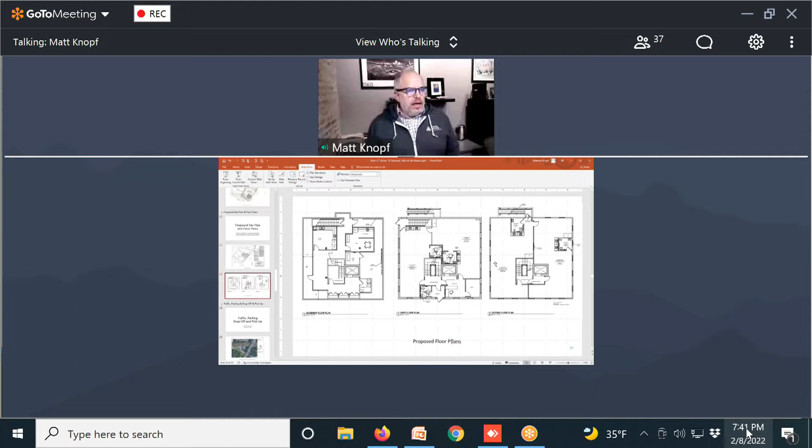So the first slide is in regards to classrooms, age range, and student count. There was some question on how the makeup of the school would be, so I wanted to clarify that, as we said and showed in the floor plan, we have 4 classrooms on site. First floor, we have a Nido classroom and a toddler classroom. On the second floor, we have 2 children's house classrooms.

On the Nido, this is actually incorrect, there should be 3. The age range for Nido is 3 to 18 months. Toddler classrooms is 18 to 36 months. Both children's house classrooms are 36 months up to 6 years old. You can see this is how the student count would break down in those classrooms. The opening is what we're anticipating as max enrollment once we ramp up, and then once we get accredited, our steady state enrollment is projected to be 78. That's what we're basing all of our calculations on regarding parking, trip generation, and everything, on the larger maximum number. I'll pause there if there's any questions on the classroom makeup, and then we can move on to the site plan and other information.

The time period between student opening and steady state is what? And that's dependent on state certification?

Yeah, it usually takes, my understanding, and Sarah maybe you could speak to this, but it usually takes like 1 to 2 years for us to get an accreditation in place. Similarly, it takes about the same time, we say 2 years, maybe a little longer, maybe a little bit shorter, to ramp up to a steady state. So we would anticipate in a year or 2 we'd hopefully be hitting this 56 mark. And if we're also simultaneously accredited by that point, and the need arises in the community, we would continue to ramp up to the 78.

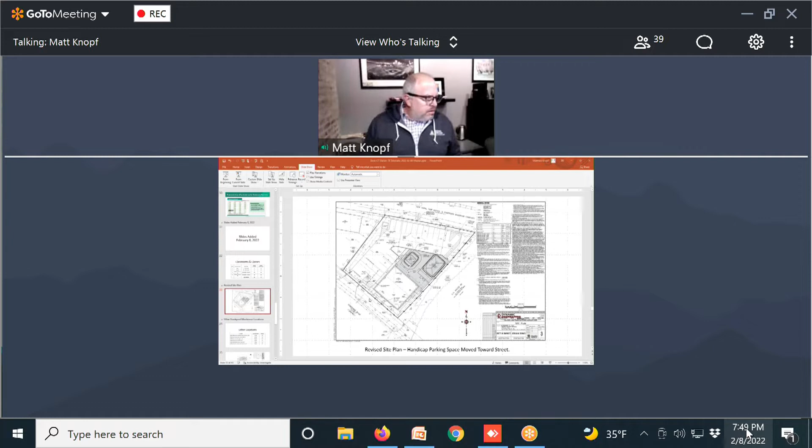So what we did is we looked at moving this ADA space down closer to Tokeneke Road, assuming that 90% of the time or whatever the number is, that space is not utilized. That allows for, in the worst case scenario, if a car is backing out of this space and creates a stoppage, at least one full car queued on site and a second car queued within the driveway apron, which is probably not optimal, but in reality we could accommodate two vehicles queuing. The traffic analysis showed it really only warrants, based on the number of trips in ITE, a vehicle queuing of one.

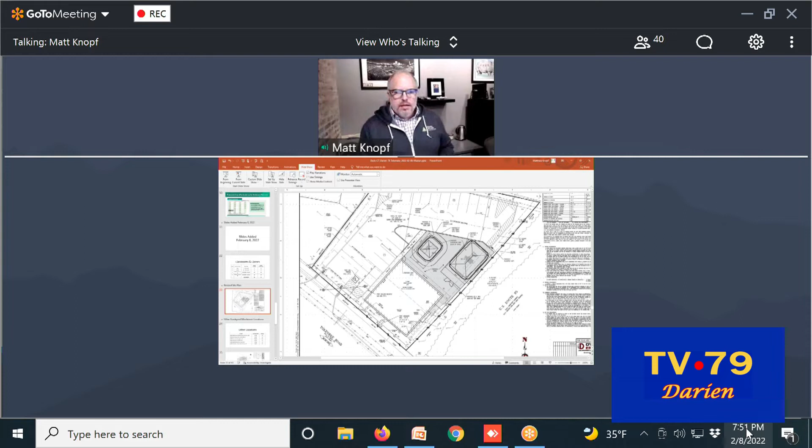So what does that really mean? That's kind of some of the facts. So what does that mean moving forward in future considerations? As we stated last week, based on being parked per municipal requirements, the morning peak produces about 3 to 5 trips, and we've got 9 spaces to accommodate this. We have the ability to queue a minimum of 2 cars, and more if there's not a conflict at that first space. We feel the site will experience a steady flow of arrivals and departures throughout this peak period and will not cause parking congestion or queuing out onto the right of way.

That said, if in the future, as we ramp up like we talked about last week, we're willing to look at mitigation efforts. We've talked over the last week, even as recently as today, about a few different methods.

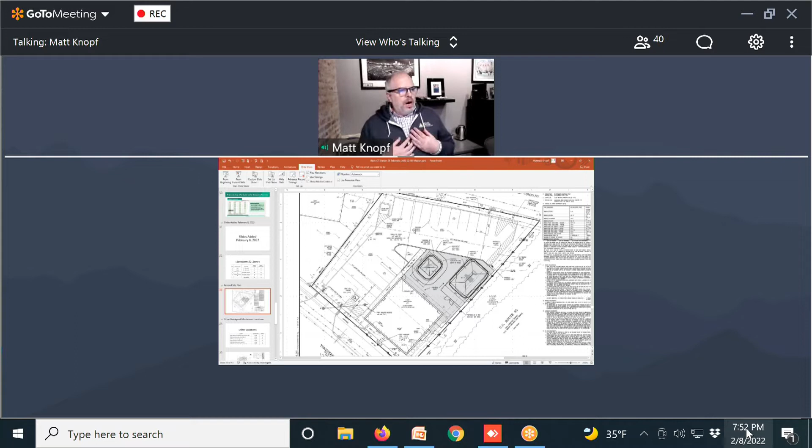One, we can look at off-site municipal parking for staff. We also talked about, and it may have been a suggestion from staff, using some of the spaces in the back as pickup and drop-off spaces and making those the staff parking, so you have additional queue space to get into the site. From our perspective it's not as optimal because then parents are walking their children across the drive aisle. We could add more sidewalk, some crosswalk striping, or something to make it a safer solution, but it's something we're willing to look at.

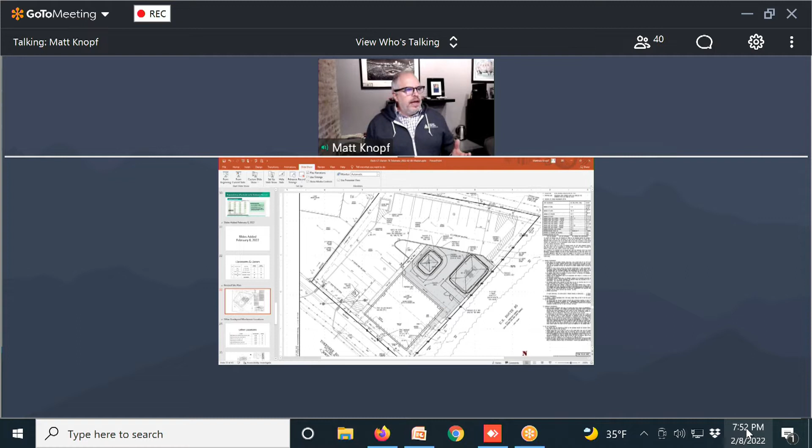But most importantly, what we would implement is what we talked about last week, our valet operation. We've got a video to demonstrate how that works. Before we show that, we did identify - let me zoom back out here.

We do have site plans of these locations if we want to look at them, maybe through the Q&A portion if you guys have questions. The only other thing I want to leave you with, which we think is really the long-term solution if there does become a problem, is our valet procedure. I happened to have that teed up as well.

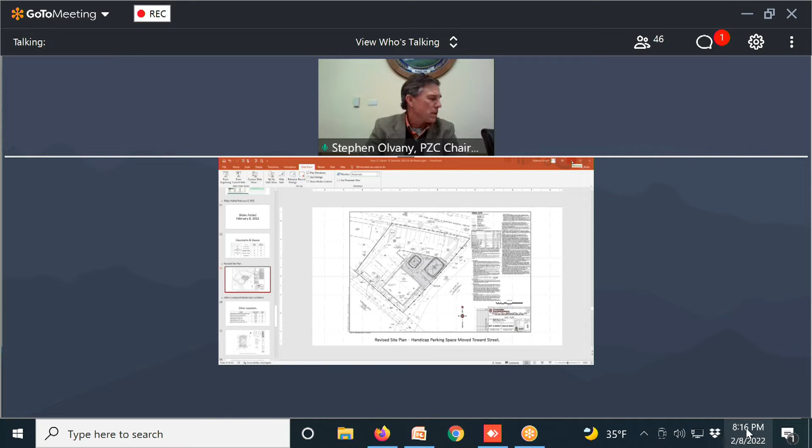I don't recall, is there a crosswalk going across Tokeneke Road there? I know there's one that goes from that island where Sono is, across the island if you stay on the east side of Tokeneke Road, because there's a new sidewalk the town just put in about a year ago. But I don't know if there's a crosswalk across the street, because I'm wondering if we might think about putting one in there, potentially for people walking to get coffee or parking in that lot behind Sono. Yeah, Adam, I can answer that. Tokeneke Road is a state road, so the town would not be able to do something like that. It would be up to the state on whether they could safely install a crosswalk, or do a crosswalk to that exit.

I don't know. My guess is probably not, but it would totally be their call as to whether they could. Certainly the state will have their shot at this, no doubt about it, because they need a permit from the state.

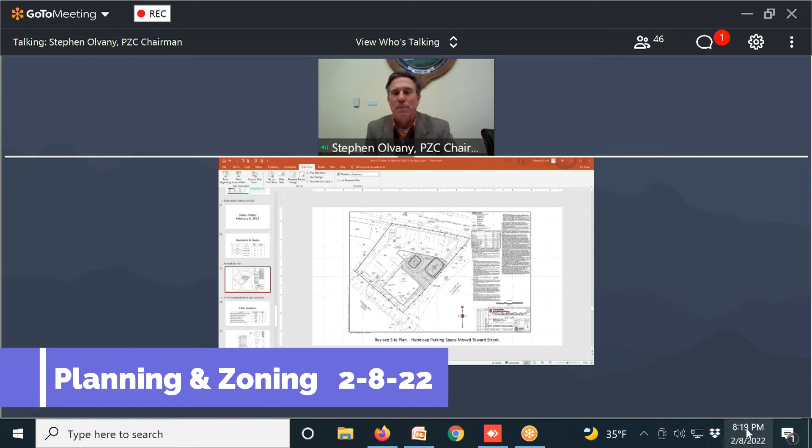But Corey, earlier Adam made a couple of questions relative to the parking lot and the turnarounds and hammerheads and whatnot, to be able to come in instead of doing a 3-point turn to get out. If I take my SUV in there, Adam is a future customer of the school because he's got kids in this strike zone.

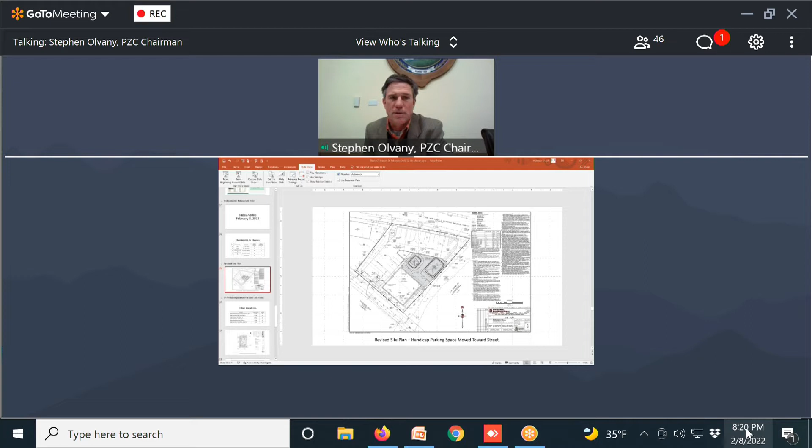You say, can you maybe answer his question, since you're the traffic engineer and looked at the site plan pretty extensively? Yeah, certainly.

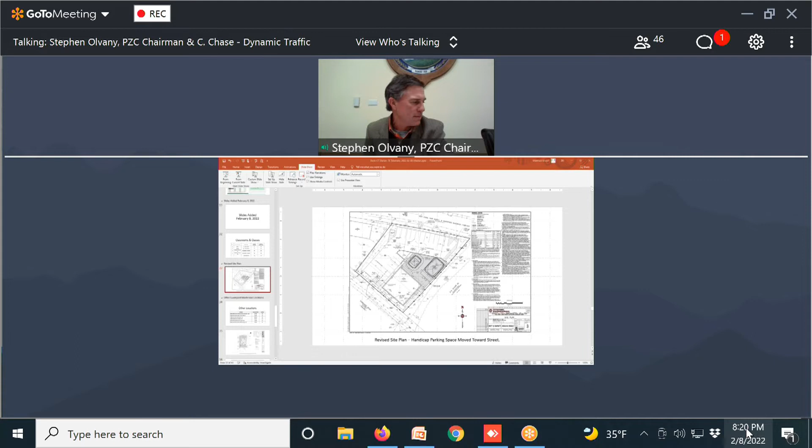So we are providing 24-foot wide drive aisles. Those are standard width drive aisles for perpendicular parking spaces. The intent for the valet, if that is utilized, would be for parents to still pull into the parking stalls. We're not intending to implement any one-way circulation where they would just drive through, drop off, and continue driving. The intent would still be that they would pull into a parking stall, a staff member would greet them at the parking stall and take their child from the car, return them back to the sidewalk area before that parent would leave.

So it would still function much in the same way it would without the valet. The intent is just that the parent wouldn't have to get out of the car and escort the child into the building. That would be done through staff members. So the drive aisles, again, are in compliance with standard drive aisle widths for perpendicular parking. So we think that they'll function both safely and efficiently.

And the idea with moving that ADA stall to the furthest point south was to create that additional offset from Tokeneke Road into the property. Obviously, not only do you have the ADA stall, but you have the striped landing space beside it. So you effectively get the width of 2 parking stalls in addition further into the site away from Tokeneke Road to accommodate any additional traffic that was to queue there.

Okay. Yeah, I see. And what about, would you recommend moving the ADA spot further to the north?

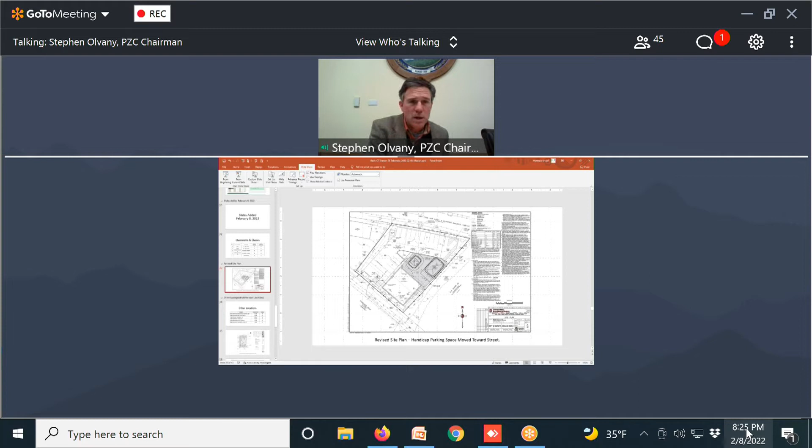Before we adjourn this hearing, any other questions from any other commissioners, or anyone in the general public like to speak in this public hearing? Okay, we're good, Jeremy? So the public hearing will be continued to Tuesday, February 15th at 7:30 PM, with the Zoom meeting details to be posted this Thursday afternoon. Great, thank you everybody, thank you everyone.

All right, next item on the agenda. Proposed amendments to the Darien Zoning Map, COZM number 1-2022, and land filling and regrading application number 524, Frank Bongiorno at 78 West Avenue. Proposal to rezone 78 West Avenue from R1 half to R1 fifth. Proposal to raze the existing residence and construct a new single-family dwelling in generally the same location, install a pool and patio, a new driveway, and perform related site development activities, including the regrading of the property and installation of stormwater management. The 0.27 plus or minus acre subject property is located on the north side of West Avenue, approximately 160 feet east of its intersection with Bailey Avenue, and is shown on Assessor's Map number 18 as Lot 6 in the R1 half zone.

Jeremy, what do we got? This is a two-part proposal. First part is to amend the zoning map. You can see from the submitted materials it's a small change, just moving the existing zone boundary one lot away. Similarly, the proposal is to construct a single-family residence. There's a little regrading associated with that residence, and you can see the submitted plans show that regrading. In this case, the rezoning, changing the zoning map from R1 half to R1 fifth, would not change what this is, which is one building lot in the town of Darien. It is currently a building lot, it will remain a building lot, but it will be a little easier to conform to the regulations. They wouldn't need a lot of variance and things like that.

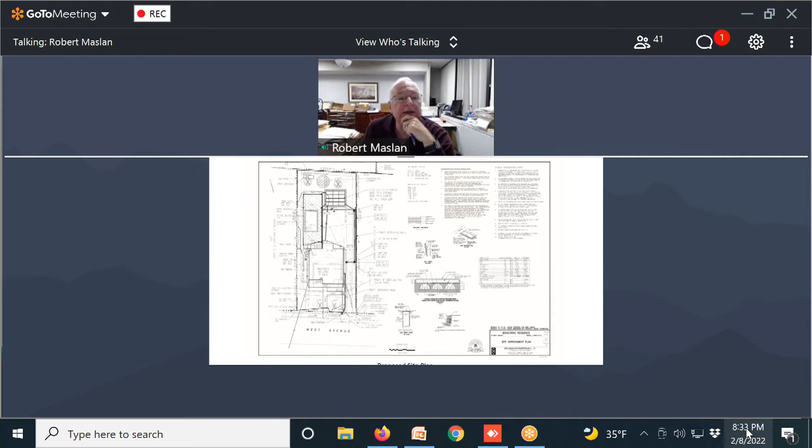And if you're interested in what we'd like to do here, let me just blow this up. The proposed dwelling is pretty much in the same location as the existing house, which is in this kind of lighter gray outline. The proposed house is larger, but it complies with the building coverage and other area and bulk requirements. The good news is you now get a 50-year stormwater system.

New catch basins along the driveway here, minimal grading along the side here and along the back end of the pool. The infiltrators are off to here. Everything gets piped back to the infiltrators. The accompanying engineering report or engineering summary documents all of the required stormwater analysis.

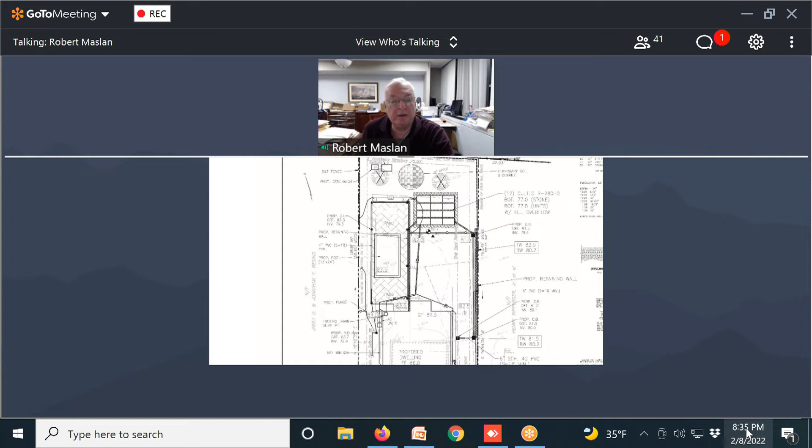I think that once this zone, if the commission approves the zone change on this, the rest of it's an over-the-counter permit, subject, of course, to this little minor grading thing if the staff determines that the applicant needs a permit for that. And that's it.

The project will comply with all the area and bulk regulations. They're getting an engineered drainage system. The DPW comments will be addressed in the process of submitting for zoning and building permits, which would happen anyway in an over-the-counter situation. Site grading is very minimal, less than a foot for most of it. It might reach 1.5 to 2 feet in a couple of spots, but that's basically it.

So, short presentation. It's really primarily a zoning map amendment intended to bring this lot into compliance with the adjacent lots across to the east and the lots across the street. And that's what I have.

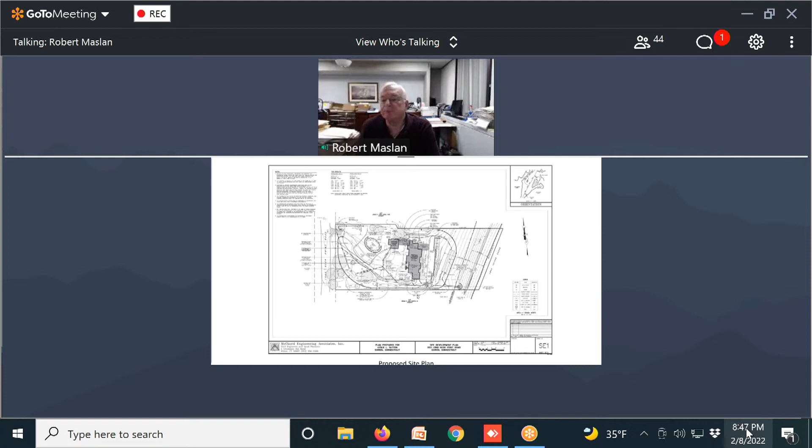Sure, thank you, Bob. Harry Rocheville, Professional Engineer in the state of Connecticut with McChord Engineering. Bob, if you could just zoom in a little bit, that'd be great. Perfect. So as Bob mentioned, this is a tear down rebuild project. The proposed house is located in generally the same location as the existing house, same for the driveway, besides just a minor reconfiguring.

It's going to be a proposed 3-bedroom house. As Bob mentioned, there is an existing septic system that will be abandoned. The existing septic tank will be crushed, and that will all be done per State of Connecticut Public Health Code.

We will tie into a low pressure system on Long Neck Point Road. There is already a curb box there for the connection, I believe, as there was some call-before-you-dig painting pointing into our property. That will be confirmed with DPW at the time of construction, but I believe the connection point is already there.

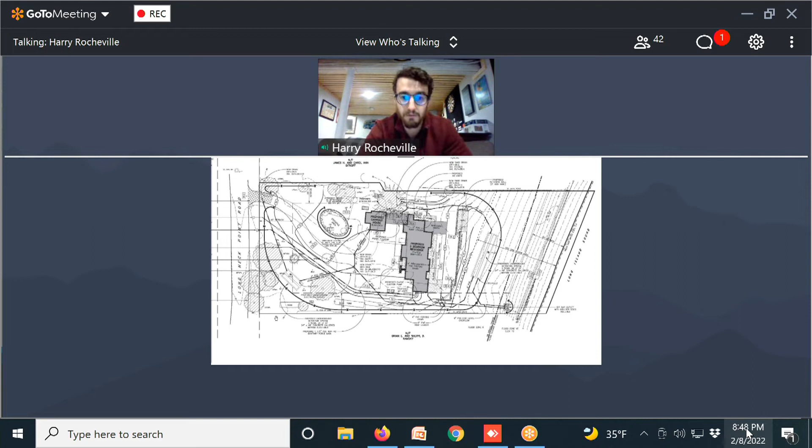Drainage will be accomplished by creating a modest high point in the center of the driveway, as it is a generally flat front yard. We want to create positive pitch to move drainage along the driveway towards our drainage structures and away from the neighboring properties. Currently, all the runoff runs down to Long Island Sound from west to east, and we will be conforming to those existing conditions by routing all the driveway runoff.

First, with a driveway drain at the beginning of the apron, that'll be routed to a smaller detention system in the front yard, which will have a high level overflow connecting to the other driveway drains, eventually making its way to the detention system located in the rear yard. Along with the driveway runoff, we will also be capturing the entire house, with roof leaders all routed to the same detention system.

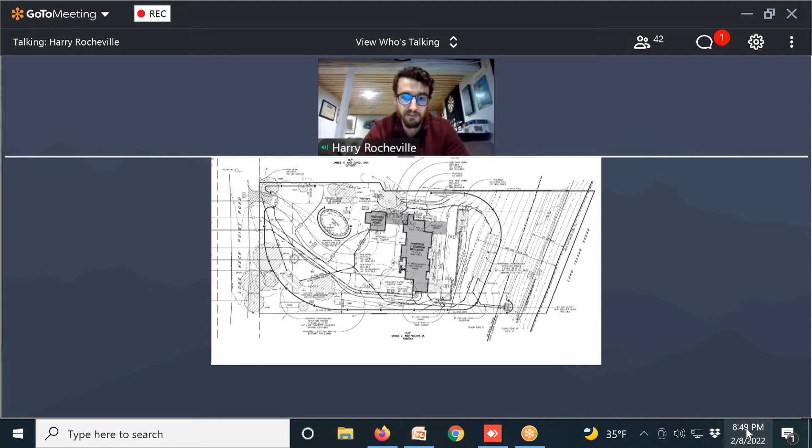The other thing we'll be capturing is a little portion of the property to the north that drains down towards our property. It's nothing major, just a natural low point between our property and theirs, not a big area at all. We will be putting some drains there as well, just to mitigate any ponding that may occur during storms up against our proposed house. That will also be routed to the proposed detention system in the rear yard.

As we are on the shore in a coastal area, we have designed for the first flush volume, in which the detention system is sized to accommodate the first inch of all impervious surfaces that drain to it. The detention system will have a high level overflow directed to the riprap outlet that Bob mentioned earlier. I know DEP said that outlet was within the flood zone, which is a little confusing, as I'm sure you're all aware that FEMA flood zone lines aren't entirely too accurate with the topography.

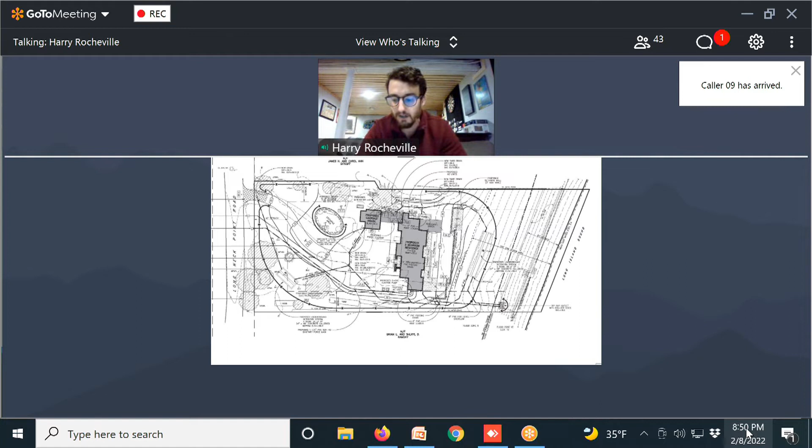The flood elevation at this property is elevation 15. Our outlet will be at elevation 18, so we have no concern of any flood waters backing up through our drainage pipes. To that same riprap outlet, we will have a gravity footing drain from footing drains around the house, also routed to the same riprap outlet by gravity—no sump pump needed here. We were able to achieve gravity flow.

As DEP mentioned, erosion controls are required on all projects, especially on the coast. We have silt fence surrounding the entire area of disturbance. We have a stockpile area located in the front yard, which will also be surrounded with silt fence. And we have a construction anti-tracking pad at the existing curb cut to mitigate any dirt being brought on and off the site during construction and getting into the drainage system on Long Neck Point Road.

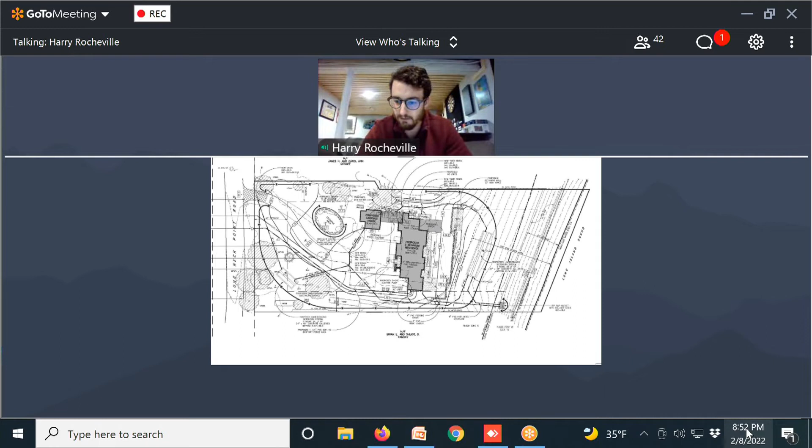Underground utilities with electrical and town water service will run around the driveway to the existing residence. There'll be a small retaining wall in the backyard to create a level lawn area east of the covered porch, with a small patio that will run off over about 120 feet of lawn before reaching the riprap outlet into Long Island Sound. We determined that the amount of lawn that small patio runs through will be sufficient for water quality purposes of that small amount of runoff before it reaches the Sound.

That essentially wraps up the site plan. It's a pretty straightforward one. I'd be happy to answer any questions that any commissioners may have.

Okay, thank you. Appreciate that. I've got questions on the house or the development—is that going to be you or is that going to be somebody else?

Well, the architect's here for the house. Okay. Hi, I'm Brendan Boatwright, and I'm the project manager with McAlpine Architecture.

Fantastic. Shall we move on, Steve, or do you want to see if anybody has questions about the site plan? Yeah, thank you, Bob. Does anyone have questions on the site plan? McCord's been here before—it looks like that retaining wall is not really moving too far from the one that exists today.

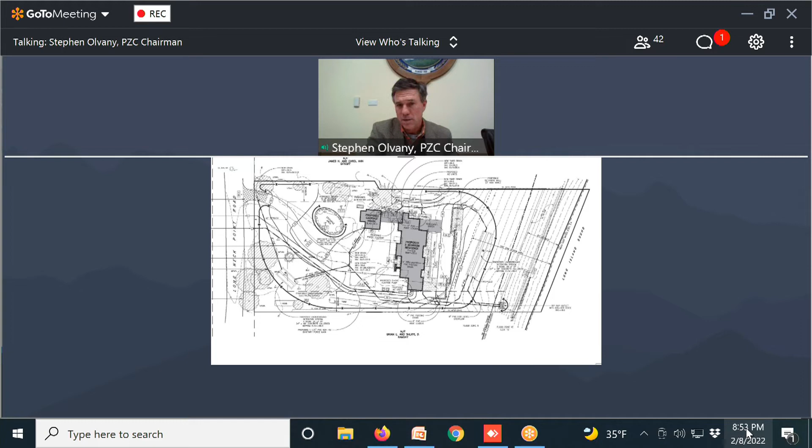The culvert and water retention stuff looks like it's in proper order. I was going to ask about the basement levels for the garage that affects the site plan, but I think we covered that. Questions from commissioners on the site plan at this point?

Wave your hand, smile. I think we're good. Keep moving, Bob. Next, Harry, you want to just comment on the footing drains?

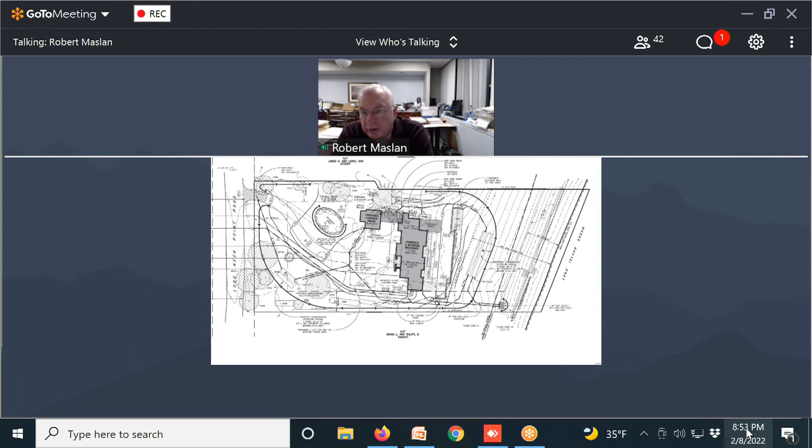Steve mentioned it, it's got to do with it. I was trying to see if the garage is on a slab, and the other portion, I think it's a screened-in porch, is a slab. I'm just looking at the basement plan of the architecturals, trying to make sure all that stuff's covered.

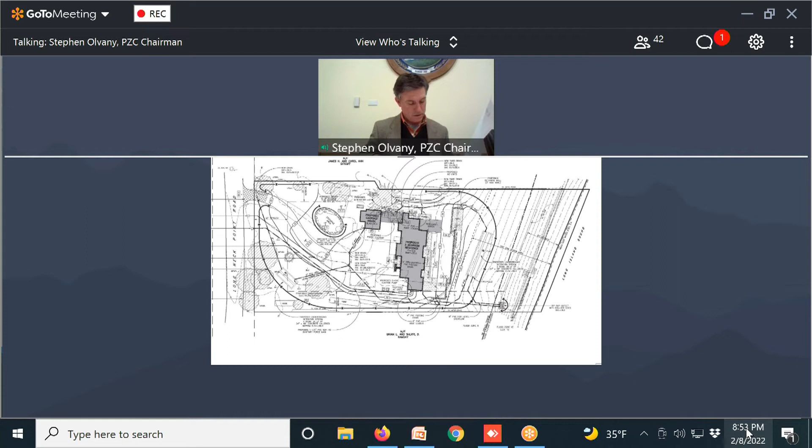From our perspective, Chairman, we do have footing drains around the whole house, and we're able to achieve gravity flow to our outlet. So the basement is above the flood zone, so no concerns on our end as far as the basement goes. Great, thank you.

Okay, next, Brendan, you're up. As it's fairly clear, the site is going to remain largely undisturbed outside of the immediate area around the existing house, and they're basically in the exact same location.

Since we already did the site stuff, yeah. So the house is sort of an English cottage style house with a hand split cedar roof and a mix of leaded glass and wood windows and stone and shiplap siding. So it's kind of a rustic old world feel, almost like something you'd see in a 1920s cottage in that part of Connecticut.

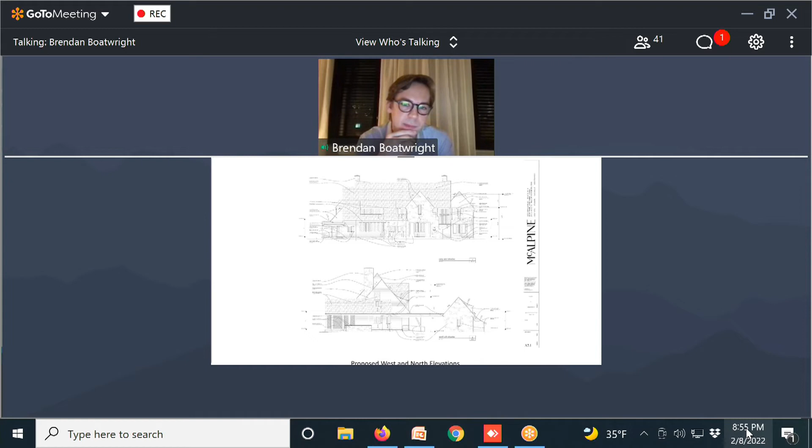We meet all of our height restrictions, and it's within all of the setbacks. The goal is just to have this be as charming of a coastal English style cottage as we can do. The house is fairly modest in size, especially for the lot, and I think our total square footage heated above grade is somewhere around 4,400. So not terribly big.

Okay, that was some of my thresholds. It's 3 bedrooms. How many bathrooms in it? There are 3.5 bathrooms.

And then the house is 4,400 square feet, or the house and the carriage house is 4,400 square feet? The heated portion above grade would be 4,477, and the carriage house, I believe, is an additional 450. I need to verify the carriage house number, but it should be on the first floor plan.

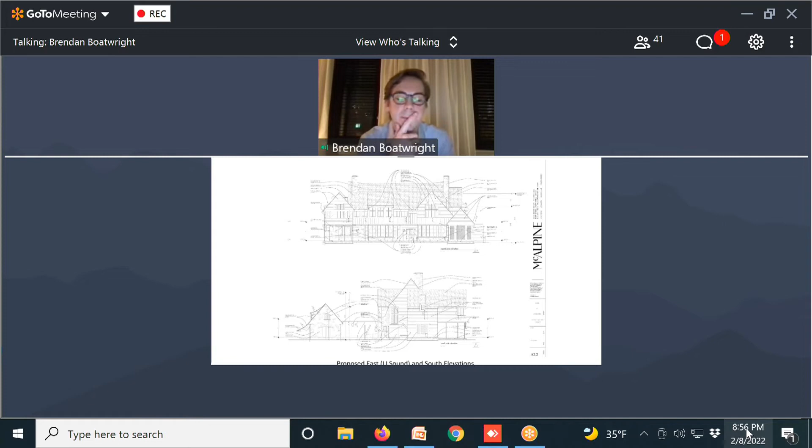With regards to the carriage house or garage, whatever we're calling it, I think the plans go back and forth 2 different ways. Is it a 1-car garage? Is it a 2-car garage? Is the second floor finished? It says open to below. Can it be, is it gonna be an ADU someday? We don't have ADUs in town yet, but we might someday. So it's a 1-car garage, and the second floor is going to be unfinished with a pull-down stair, and it's actually not tall enough to be habitable. Essentially, you can only stand upright when you're directly under the ridge line, so there's no chance of it being converted into any sort of living space.

That's too bad, we may have ADUs in town someday. Some storage, you got storage in the basement too, a lot of storage down there. Okay, so the basement is partially finished. You got a craft room, a mechanical area, and then just a stair hallway, and then a large storage space.

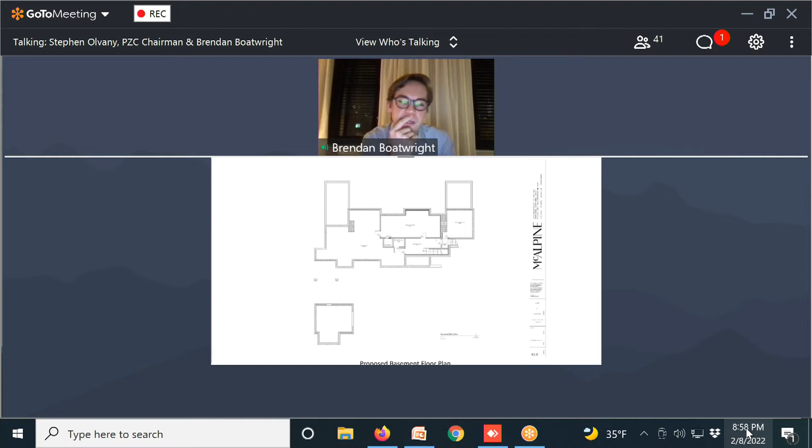And so that's still in discussion, but it likely might end up where it accesses directly to the storage room.

Is there an elevator in this thing? There is an elevator, it's in the middle, next to the... Yep, I thought so. All right, cool.

I think I got it. Any commissioners have any questions on this one? We're talking architecture for the house now.

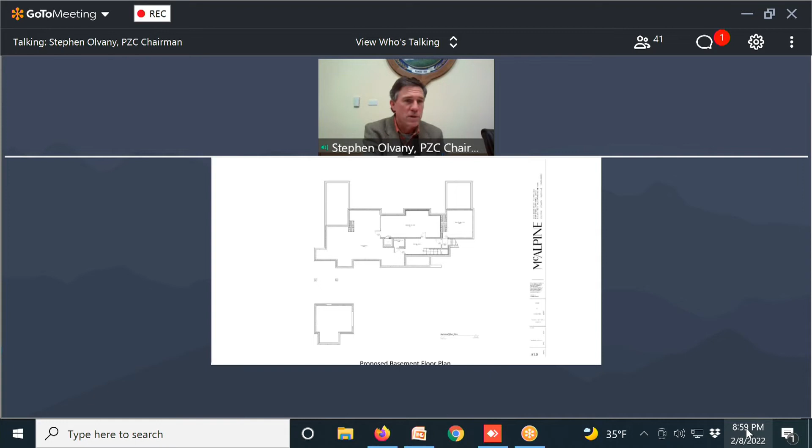Looks like everyone's good. Are we gonna do the landscape plan? There's no landscaping required because it's a single-family house, so whatever landscaping they put in, it is what it is. If you want to have Catherine give us the landscaping, we'll blow through that real quick.

I'm sure she's proud of what she designed. I'm staring at her, sure she is. Smile on her face. There she is. Hi, Catherine Herman of Catherine Design.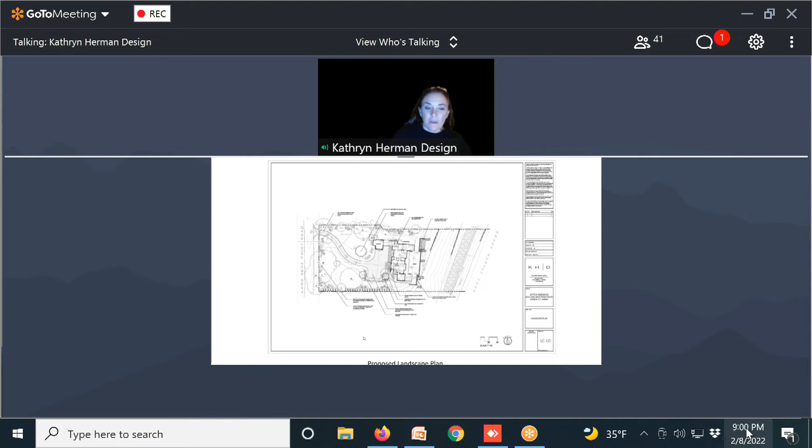I think Harry covered a lot of it, but just to touch on it, we are making a bit of a minor shift in the shape of the driveway. The driveway opening is going to remain essentially right where it is. And then we have reconfigured the parking in front of the house so that it relates better to the proposed architecture and the new detached garage carriage house, if you will.

We are looking to preserve all the very beautiful mature trees that are on the property, so we've been very mindful about that. There's a great magnolia on the property, some maples, and there's a really beautiful cedar at the back of the house. So there's been a lot of care to make sure that we're keeping all of those large trees.

We have no plans for any sort of landscape, just to maintain the lawn at the back of the house. There is a very subtle change to that back retention wall. I'm not sure you can quite see it on this plan, but essentially the new wall will replace the existing wall, which is in poor condition.

We're using that as an opportunity just to straighten it out and have it relate to the architecture, and allow for nice circulation around the back. We've added 2 little small staircases that take you down to the lower level, as opposed to the one that currently exists. But everything is outside of that 100-foot CAM review area.

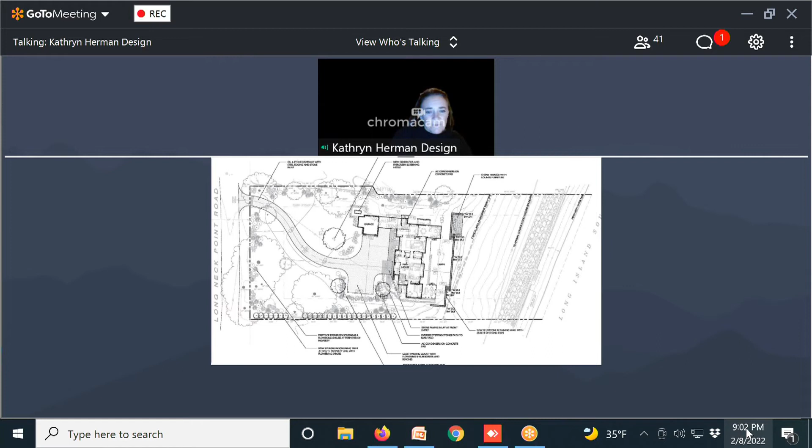There is, I think it's fair to say that we will do some outdoor lighting, very minimal though, low surface stuff. Yes. Cool, thank you. You want us to put a lighthouse up so you can keep your bearings? My kid fishes out in front of this thing all the time. At least I know where he is.

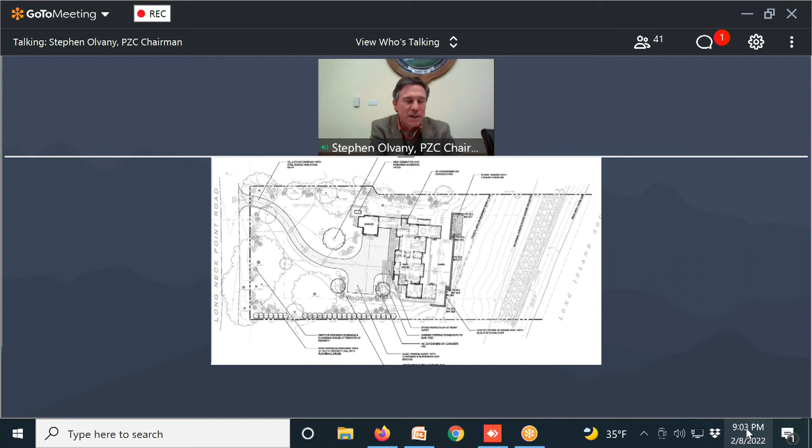Any other questions for the commissioners on this aspect of the application? We just did the site plan, we did the house, and we did the landscaping plan. I don't see anybody jumping up and down. Fantastic, all right, great, sounds like you did a great job.

Anybody, just to wrap up, I was going to open the general public real quick. Okay, anyone in the general public want to speak to this application?

Seeing none, we got that out of the way. Okay, go ahead Bob. I just wanted to go through these few additional items.

DEEP commented with an email. Harry covered this in his comments. I think one point to remember is this riprap outlet is going to be incorporated into the existing riprap along the coastline, so there shouldn't be much of a concern with respect to the V zone. If you look carefully at the survey, you'll see the boundary of the V zone is at about elevation 20, but the V zone elevation is only 15. So if there is a fudge factor here, it's to the detriment, I guess, of the property owner, to be on the cautious side.